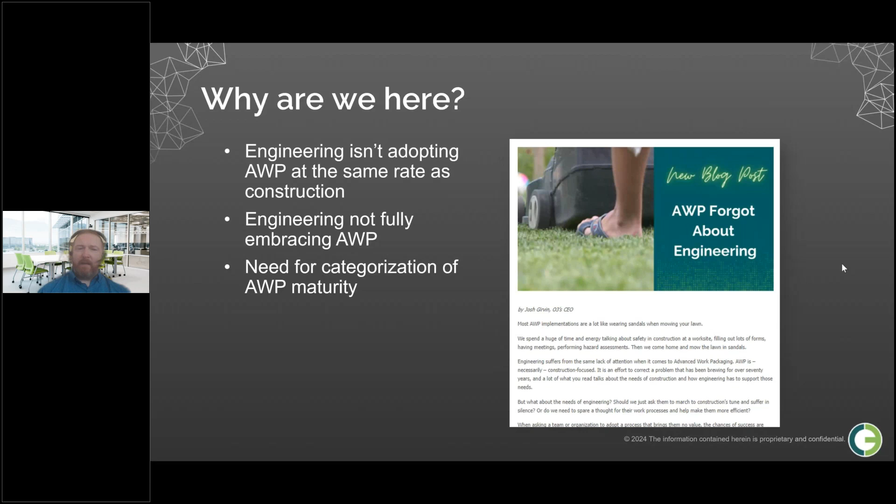So we're going to try and cover some of that today. The way we're going to look at this is by exploring the 4 levels of AWP for engineering. We very deliberately numbered these 0, 1, 2, 3 instead of 1, 2, 3, 4, mostly because level 0 is the status quo—we're not doing AWP, we're not really getting involved.

Level 1 then gets into, okay, we're starting to look at workface planning and what engineering needs to do to support it. Level 2 gets into, okay, now we recognize the value of workface planning, and we're going to start to pull AWP backwards into those engineering stages. Then level 3, this is the top end where we've actually got the engineering team fully on board, recognizing the full execution value of AWP and the benefits of that to engineering directly.

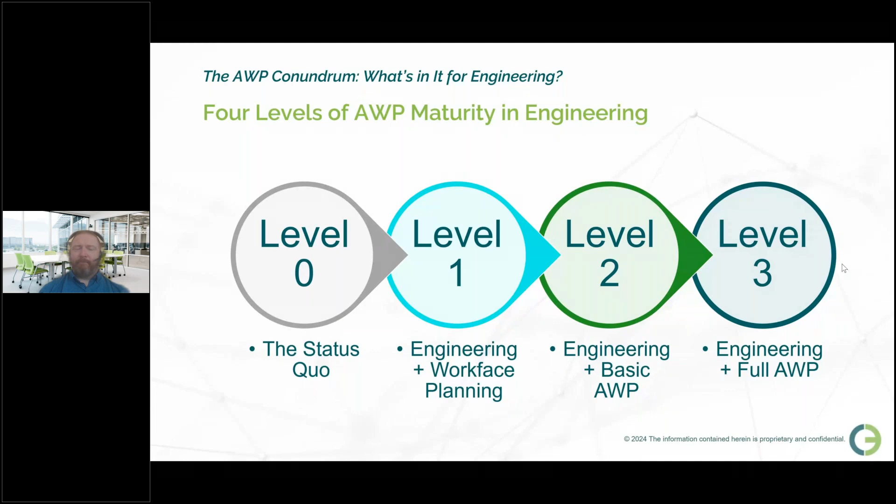So let's start with level 0, status quo. This is what I would call the traditional approach. During the early stages of a project, engineering is optimized for engineers. There's nobody from construction involved, or if there is, it's very, very rare and oftentimes too late.

So what happens is engineering is planning their work. They're building these beautiful waterfall P6 schedules, figuring out these long and complicated things they're going to have to do to start putting together drawings. And then we get to this fence, this barrier, and engineering is dropping stuff over the fence to construction.

Now, this is not engineering's fault. We're not pointing fingers. This is the way they've been governed—they've been told, your scope is this, you're doing engineering. And they're dropping things over the fence to construction.

And construction's attitude is, okay, this is what I'm getting, so I'm going to have to make the most of it. I once sat down with a construction person early on in a project and said, how do you want to build this? And he looked at me like I was crazy, because nobody in his 35 years working had ever asked him how he wanted to do it. He was used to just being handed a bunch of stuff and told, make it work.

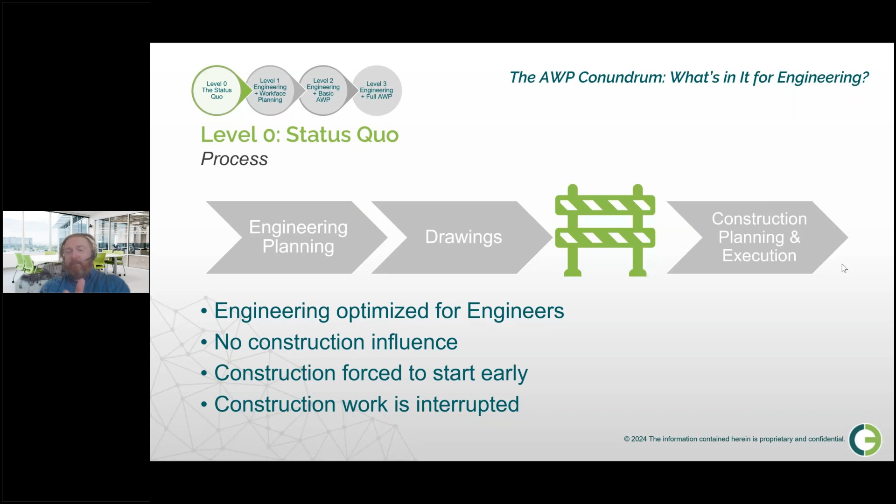During this level 0 status quo, we also see construction forced to start too early. We've been waiting for drawings, so the second we get the first set, go to the site, start doing something. And then construction is rushed to start and engineering can't keep up, so construction becomes start, stop, start, stop.

So what does it look like in terms of investment in this traditional sense? During the engineering phase, we're seeing no construction presence—engineering is done at an engineering office and run entirely by the engineering contractor. In the construction phase, now we're introducing the construction managers, discipline superintendents, and for those doing workface planning, suddenly we've got workface planners trying to corral the information they're getting from engineering and turn it into something meaningful for construction execution.

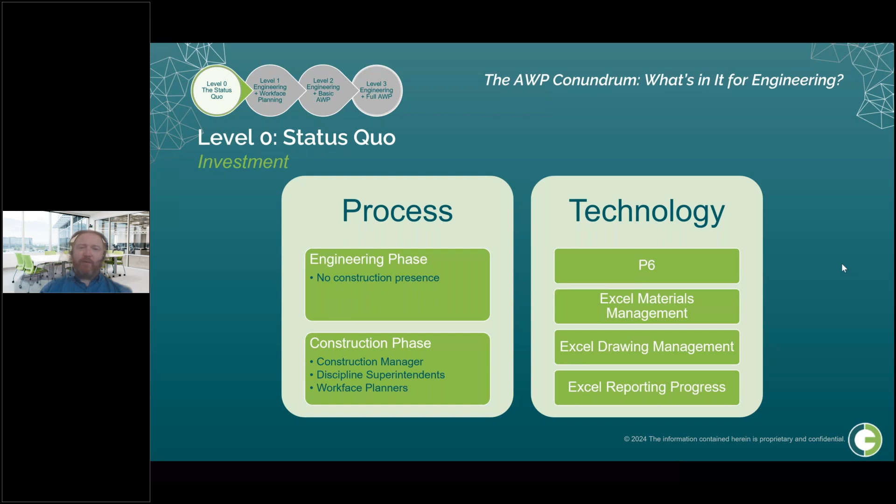We're seeing P6 schedules—plural, deliberately—because often engineering has their schedule, construction has theirs, and somebody's trying to force these two things to line up, but they never meet very easily. We're using typically Excel to do things like materials management, drawing management, and reporting of progress. We have a lot of backwards-facing reports—here's what happened last week or two weeks ago—and we're managing a lot of this just using things like S-curves for progressing.

So what are the outcomes? Construction starts too soon, we don't have a sufficient backlog, we've been rushed to the field because of that overlap between engineering and construction. As soon as we got something for you to do, go. Installation activities keep getting pushed around because I want to do my construction work in a reasonable sequential fashion, but if I've only got engineering to support this and then this and then this, I have to keep looping all over the place to do what I can with what I have.

Because of that, we can't maintain schedule dates. We can't really maintain a constructive schedule because we don't have the deliverables to support them. We also see things like safety and quality suffer. How many times have you been involved in a root cause analysis for a safety incident?

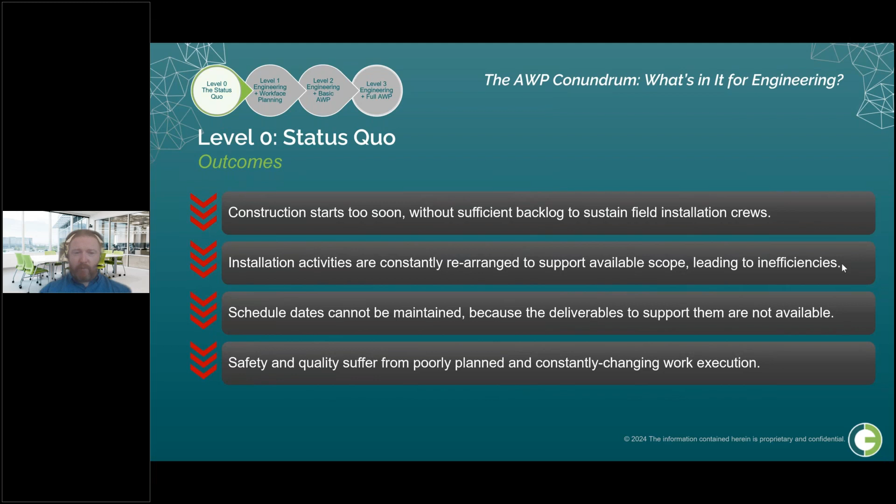If you go deep enough, you will nearly always see some element of change management as a root cause to the safety incident. We were starting this work, we couldn't complete it because we ran out of drawings or materials or didn't have a crane, so we got shunted over here to do something else. And when we set up over there, we didn't take the time to think about it fully and somebody got hurt. One of the root causes is we keep changing things on people.

So what does the technology look like at this stage? Everybody's best friend, Microsoft Excel, right? Everybody's got their spreadsheets. I've heard some astounding numbers for the number of spreadsheets that exist on projects or within companies. It's more zeros than you could possibly want to count.

The issues are typically rear facing. What we're looking at is here's what happened rather than here's what's going to happen, which means I can't influence the future. I can't see problems when they're coming. I can only see here's what we did. So we're doing a great job of accounting for what we did. We're doing a bad job of looking forwards.

And if we then try to apply any element of AWP, yes, okay, we can do things like workface planning. There is a path here to getting some value out of this. We can support, O3 can support the construction work with or without support from engineering. So if you are getting that sort of stuff thrown over the fence at you, it can still be done and we can consume the engineering data, but it's less than optimal in how we're going to do it. So that's level 0, that's the status quo.

So let's take now the first step towards engineering's involvement in AWP, and we're going to look at workface planning. So again, from a process perspective, we are now seeing the introduction of things like constructability reviews. We're starting to look at that engineering data to understand how that's going to play a role in the work that we need to do for workface planning.

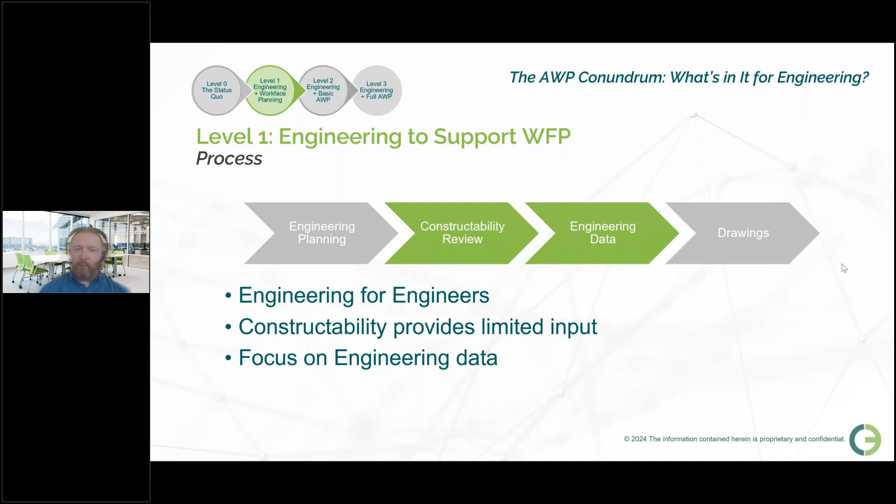So we're now starting to bring people in, we're just starting to see construction managers, discipline superintendents, but constructability is a very important topic, and it's a very important thing to do. If we catch it early enough, it's very valuable, but it's typically sporadic. I've been involved in constructability reviews where you get 20 people in a room for a day and you do this big long process, and then everybody dissipates. The construction people are off doing another project, the engineers get back to what they're doing, and you've got this small action list that comes out of it. So it's a valuable added thing, but it's not being repeated, it's not being done frequently enough.

We're also now starting to see involvement of things like 3D models, a document management system, a materials management system, purpose designed tools to help support some of this scope. So we do get a slight improvement in construction planning by using constructability. For any of you familiar with that sort of constructability influence curve, in the early stages it starts high, your influence is high, the cost is low. As you go further, the cost goes up and the influence goes down. So the later you wait to do that construction input, the less impact that it can have and the more it's going to cost you.

We're starting to see enhanced data integrity now. We're starting to do a more systematic approach to our data management rather than everything having to be keyed in. We're using tools and systems to do it rather than lots of Excel spreadsheets. We want to get value out of that 3D model. You've paid to have the engineers develop a 3D model, and we want to be able to use that for construction. But to do that, engineering has to understand what data do I need to put in it? What needs to be in this model for it to be valuable for the next phase of the project?

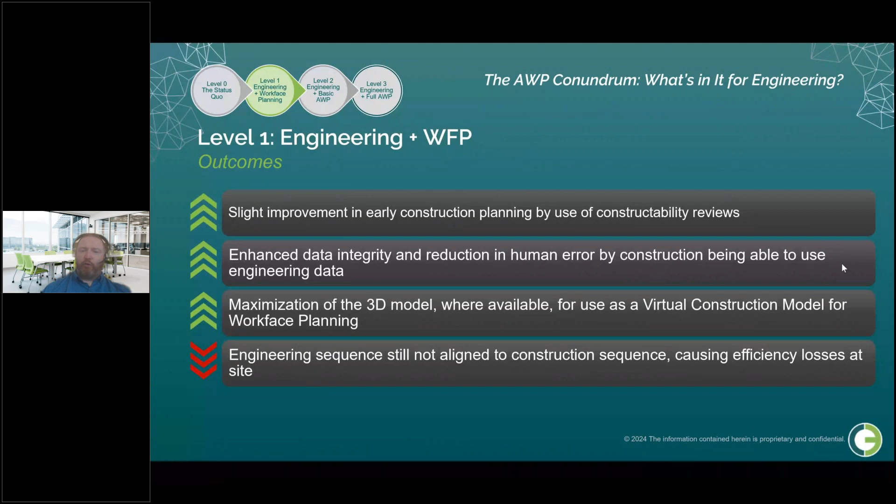And yet, we're still, even though we're getting advancements from this, most of constructability is about can I build it? Whereas what we need to be focusing on is how can I build it and how should it be built in the best sequence. So even with this level, yes, we're starting to see improvements, but we're still not getting that true sequence alignment from engineering to construction. So from a technology perspective, we can use things like O3 to help provide that constructability review, visualization of the scope. Most construction people that I've worked with over the years are very visual people.

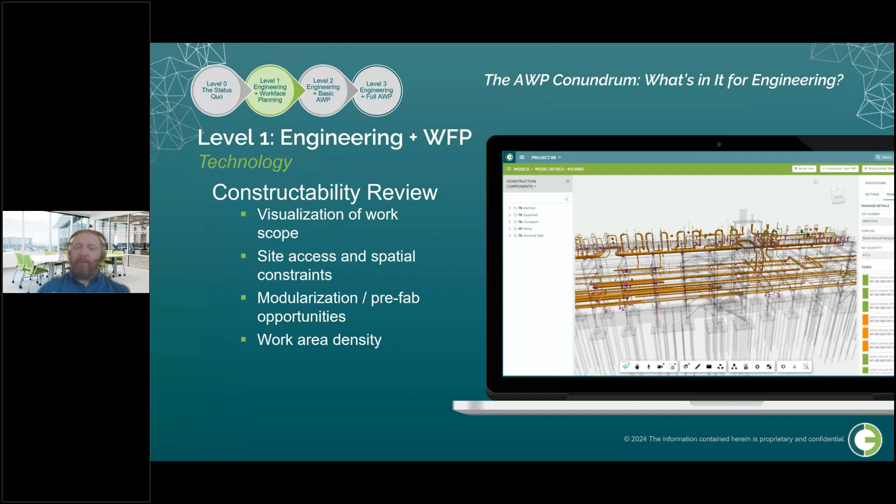You show them, you tell them you've got a big report to read through, not much use. You put it on a 3D model on a big screen and allow them to move around it and pivot around it and see what's happening. All of a sudden you can look at it from every angle and get a good understanding of the access constraints, the spatial considerations. You can start carving it up into modules. You can start looking at how many people I'm going to have to put in this working area for this to work. So that visualization can provide very valuable tools for that constructability review.

And we can start to look at the engineering data. The trick with this is to start looking at it early. Don't wait until two weeks before construction to say, I wonder if our engineering data is any good. So let's start reviewing that 3D model early. Let's give the list to the engineers to say, here's the things you need to put in it, and then hold them accountable for doing so.

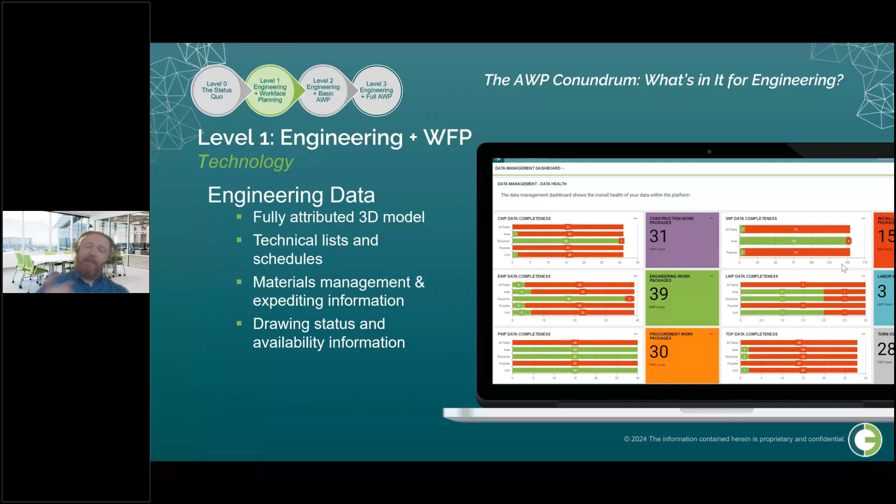We can then start tying into that materials management system, that document management system, and see this data in real time. So we can start to do a health check early on, fix the problems early on, and make sure that by the time we get to construction, we're ready to go.

Okay, level 2. So this is where we're starting to see engineering being the concept of AWP being pulled back into those engineering stages, and engineering taking a more - I won't say active role - but a more collaborative role with construction in those early phases.

So we're taking things like the engineering data, the drawings, the constructability review as taken from that previous level. Now what we're adding to this is path of construction. How are we actually going to do it? Are we going to build it left to right, north to south, top to bottom?

Whatever that sequence is, that should be the greatest collaboration exercise between engineering, procurement, and construction in those early stages. And yes, also bring in the commissioning and startup folks so that we can start to have an understanding not just of how we're going to build it, but how we're going to turn it over.

So this should be the first time that everybody - and this is sort of pre-feed, feed, FEL2, FEL3, select define, depending on what terminology you use - where we get together and say, right, we've got something as simple as a plot plan. How are we going to build this thing? And then construction will say, I want to do this and this and this.

Engineering gets to be the voice of reason in the room to an extent, to say, well, look, obviously you want to drive the piles and then put the foundation and then put the equipment on top, but we need to know how much the equipment weighs to tell you what the foundation design is going to look like, to know how many piles we need to support it, for example.

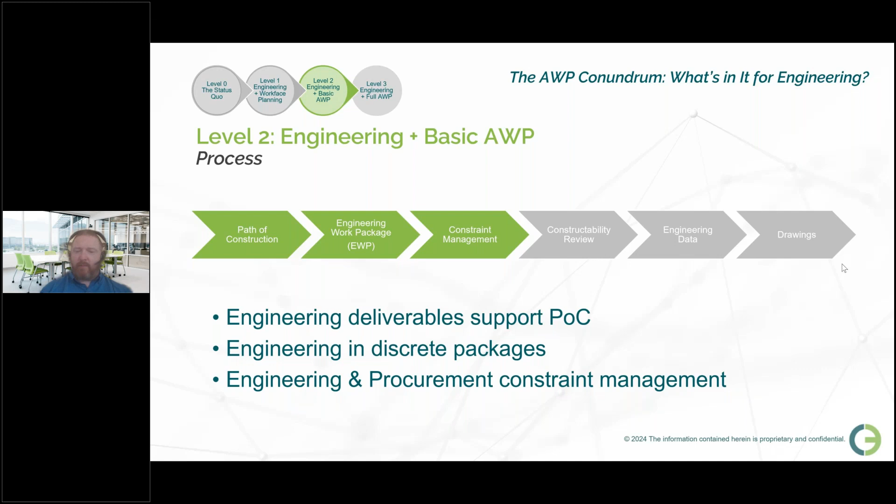I need to know the weight of this vessel and the nozzle orientation, etc. There's 1,000 things that engineering has to know that's not in their control. So we can start applying that same concept of constraint management directly to engineering.

So what does this look like in terms of process, people, and technology? In terms of the investment side of things, we're starting now to bring in those planners and schedulers. Just to be clear, in our world, in the world of AWP, a planner is the person who's designing the package and the sequence and the AWP side of it. A scheduler is somebody who runs P6.

During that phase, the construction managers, the discipline superintendents, they're not just popping in for an hour or so here or there, or turning up once every couple of months for a constructability review meeting. They are involved in the project. They're reviewing the documentation, the plot plan, the plans, figuring out how things are going to come in, how we're going to move things from one area to another, how we're going to build this thing.

And that has to then integrate with your schedule. The beauty of this is if you're doing it well, that schedule no longer becomes 'here's what engineering's doing' completely disconnected from 'here's what construction's doing.' It's an integrated schedule where we can see here's this EWP, it has a start and finish date, and when it's finished, I can then transition that scope to construction.

We're also able to incorporate things at this stage like RFI management. So the minute you get construction involved, they're always going to have questions. You can give the technology to allow construction to ask the questions and have a very visual portal that allows engineering to respond, answer, and everybody can see the status of all of these questions and answers at all stages.

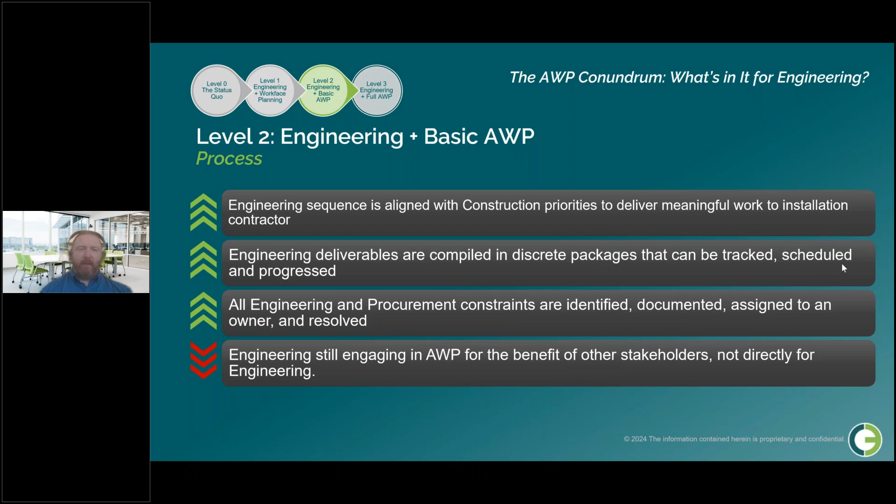In terms of technology, we can take that. So path of construction can be done in a multitude of ways. In the early stages, we can take a 2D plot plan and colorize that and mark that up, and have a Gantt view of that and see different construction areas being worked on. And then when we graduate to having a 3D model, later in the feed stage, for example, we can start to use that 3D model as the basis for a 4D simulation.

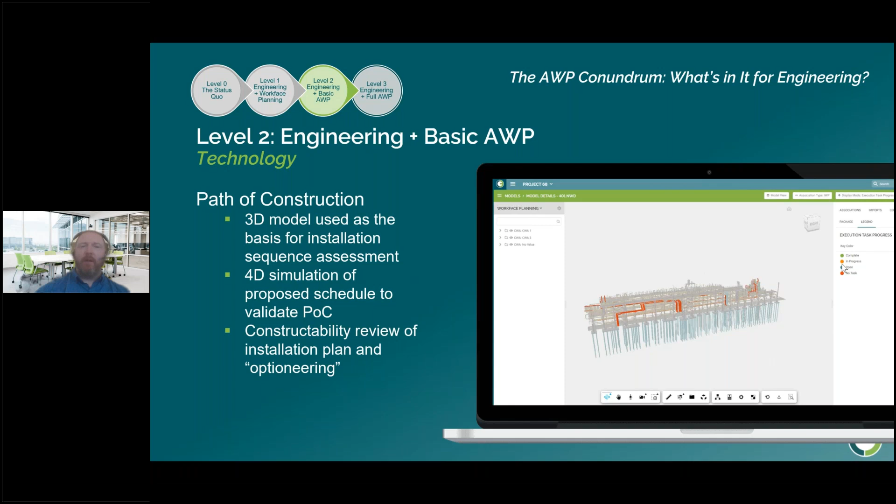And this can be done on the whole site level. It can be done right down to, as you're seeing here, a single pipe rack. So we can start doing some of that review of the plan for construction installation. We can start to do some of that optioneering. How would it work if we did it like this and this? And this is when you end up with Rev 10 of your plan, because every time you're learning more things, you're developing, refining, making it better.

And we can start to track engineering's progress against these down to that level 3, that EWP level. We've got a schedule that tells me when each EWP should start and finish, even if there's a bunch of stuff in the middle, or underneath each one, with details that really make sense to the engineers. The key point is, can you tell me the start and finish date for that EWP? And then I can do KPIs and dashboard reporting against those EWPs.

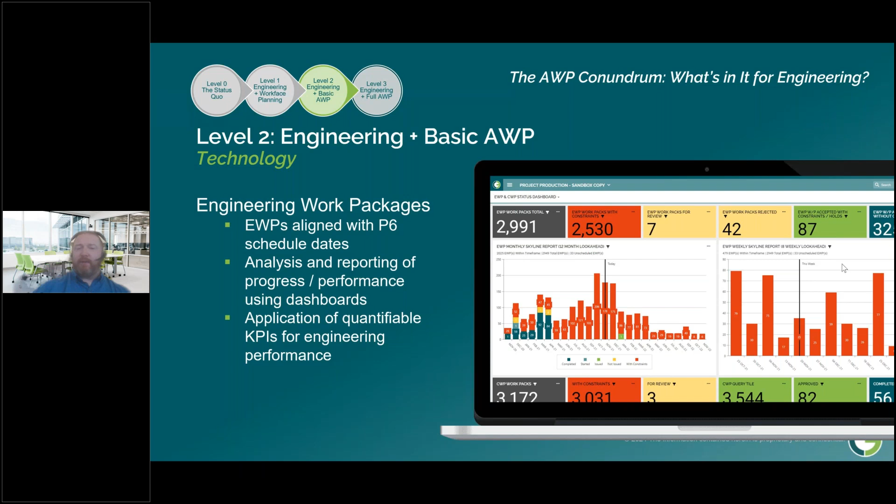There could be dozens or hundreds of EWPs depending on the size of the project. Are we getting things done on time? Are we getting the details to support them? Is it being completed per the schedule?

And then the constraint management, as I mentioned, getting this systemized, getting this in front of everybody, getting it in one central location, and everybody can see what do I have to do, who owes me something in terms of an action or a deliverable. And the project managers can then focus on the red lights. Here's a problem. You've got this thing, it's past due or it's coming due next week. Are you ready to get it done?

And also with the constraints, you can see the trickle down effect. So if I know that this package has a constraint on it, if I don't get this thing done, this engineering work package can't be done. But because we've got a decent linked schedule and associations between packages, I can show the trickle down effect that says, if that engineering work package isn't done because of this constraint, here's how it's going to affect construction, commissioning, turnover, etc.

Okay, last level, level 3. How does engineering support full AWP? This is where we start to get to AWP benefiting engineering directly. So we're doing our path of construction, we're doing our EWPs, we're doing constructability and data. Now we're starting to take a more detailed and granular approach to managing engineering.

So we've done this for many years with construction, where we take a construction work package and break it down into installation work packages. We have yet to wholeheartedly, or certainly industry wide, apply that to the way engineering work is going to be done. So we can start to look at engineering scope by design work packages, vendor scope by vendor work packages, and then apply that constraint management methodology to these smaller, more discrete packages.

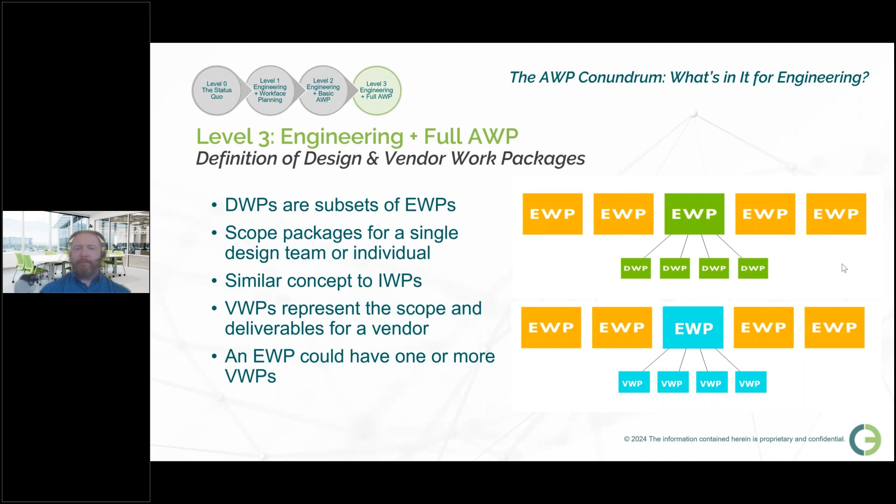So what are we introducing at this stage in terms of investment? All we're really doing is adding some technology. It's the concept of agile project management and full lifecycle AWP software. I need to be able to manage those vendor packages, manage those design work packages, not have a bunch of emails flying back and forth and a bunch of spreadsheets sitting on a SharePoint site somewhere, having everything in one place, a centralized technology repository.

Now we're getting into engineering actually getting value out of this. Now engineering's really in control of its destiny. I know what my constraints are, I'm managing those constraints at a much more discrete level. I can tell you when something is done or when it's running late or if it's at risk of running late. I can see that status, I can see those constraints.

I've got better visibility into, is my vendor getting me what I need at the right time? And if they don't, here's the impact, and you can look at that ahead of time and mitigate it. So the vendor's coming back to you saying it's going to be 3 weeks late. Do I need to throw more money at them, get them to work overtime, is that going to be value added? Well, I can follow the logic of that through my package associations and through my schedule to understand, is it worth throwing more money at it, accepting the delay, finding other ways to mitigate, etc.

We're getting now granular scope definition. We're no longer just managing by an S curve, as long as we're ahead of the curve everybody's happy. You know, those progress meetings where all you do is talk about problems and look at an S curve. The S curve tells me that overall we're in the right place, but it's not telling me, are we doing the right things? This is how stuff gets left at 90% complete for too long because we don't have the last 10% of the information that we need.

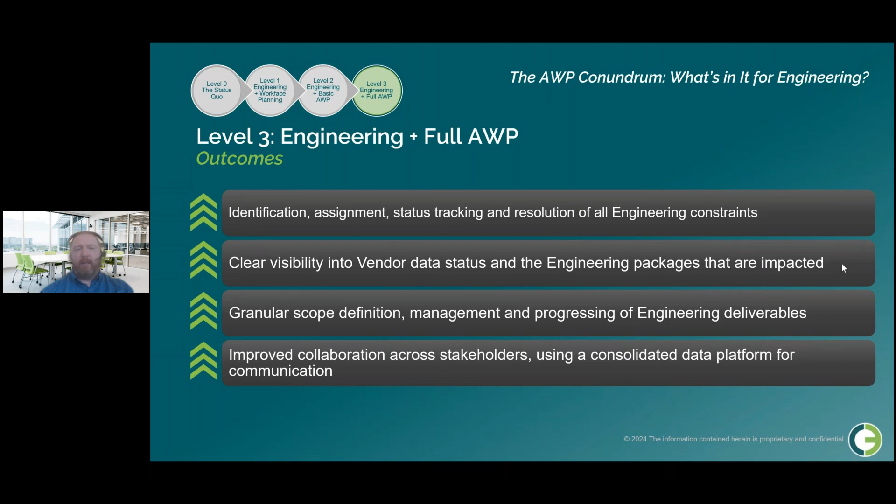In terms of the design work packages, the technology now can allow us to help support that granular breakdown. This is actually one of those instances where the theory is catching up with the technology. We designed this a few years ago, and we're actually helping CII catch up with where the technology is by producing this report we're talking about in terms of this leading practice.

This is where we're using that level 3 for engineering to say, right, sprint, 2-week sprint for this team. Here's what you're going to work on, here's the things you're going to have to do, here's who owns each one of those things, here's the dates when they need to be done. I can see when they're being done, I can improve my predictability because I can see if that person's always late, or if we've still got stuff from the last sprint we haven't finished off, I know I've got some catch up to do.

So this is taking that kind of agile approach to that work scope, instead of just having these 3 people doing the design for this whole section here and it'll be done in 4 months' time, and we just account for it by gradual progress of percentage complete, 20%, 30%, whatever.

The vendor work packages gives that clear scope identification to the vendors. Who is producing what? We can then automatically create constraint assignment between those vendor data information or the vendor packages and the underlying engineering work packages that they're supporting. So if I haven't got the vendor information that belongs as part of that EWP, I can't do the EWP.

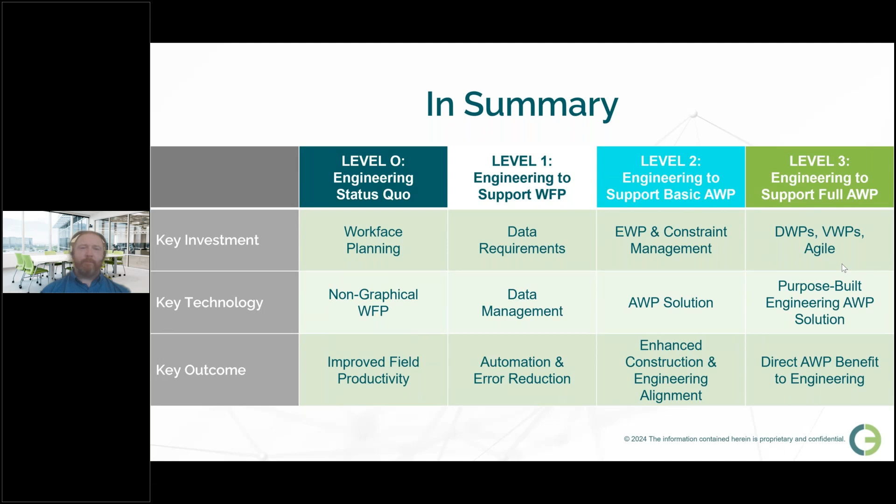So, some key takeaways. This is one that we always put in here because I think it's very, very important, especially when we're talking about multi-levels. It is a journey. We've shown here the 4 levels of AWP in engineering. You do not typically jump from level 0 straight to level 3. The most systematic approach I've seen people do with this is: identify what level you are currently at, and then do a gap analysis to the next level.

What do we need to improve? What do we need to bring in? What processes, what technology, what people do we need to get us to the next level? Then execute at that next level and do the gap analysis to the next level until you're getting it to the point where we're executing at the top level.

And instead of owners telling us, you need to do AWP, you get to go back and say, this is just the way we do it now. This is the way we're doing it across. It becomes business as usual. One of the key things to support that: training.

I've done too many meetings with engineering teams where they've got a very basic concept in some cases of AWP, but I've seen this terrifying sort of deer in the headlights look when you're talking about AWP to some engineering teams, and then you start to explain what we're doing with it and what the point of it is and how it's going to impact them, or more pertinently, not impact them.

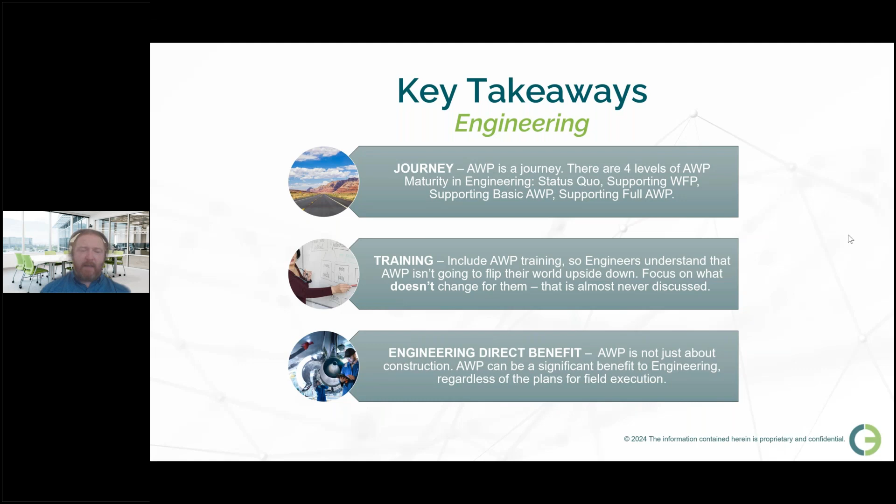There's a huge amount of this that can provide a lot of value to engineering. And a lot of that is also explained in more detail in the leading practice that's going to be published soon.

So we looked at the current state of AWP in engineering. What are the common issues that we're facing right now? Things like, as I mentioned at the beginning, this isn't engineering's problem, this is construction's problem, or this is just another thing we have to do, or there's too much data, or I have to do more with the 3D model, it's a pain.

And then we get into, okay, what does the future state of this look like? What does good look like? So this is where we see AWP is actually a value for engineering. Model data attribution becomes a matter of course. Engineering is involved with the path of construction. We get that early construction input, but again, construction is not sitting in a room on their own. Engineering's in that conversation.